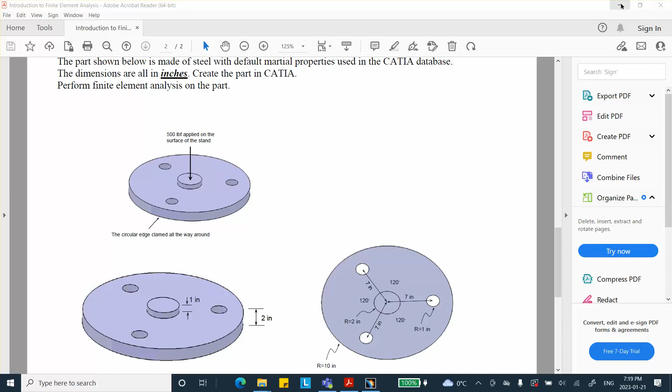All right, let's go ahead and do that. We start with the Catia file, file, new part. Immediately save it. I already created a folder there. File, save management, save as. I created a folder called Activity 3 Lab 3 in there. I'm going to call it part problem 3. Please make sure you don't overwrite parts when you write tests and the final exam.

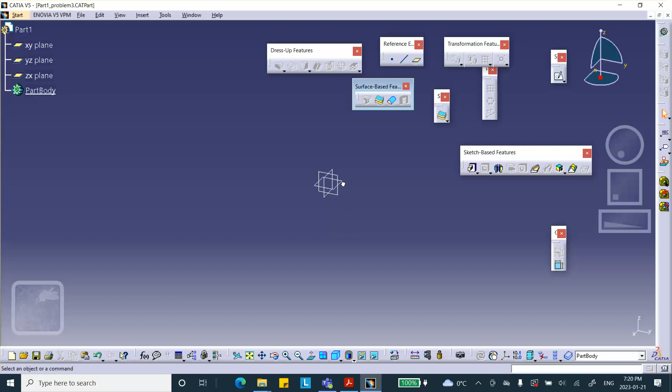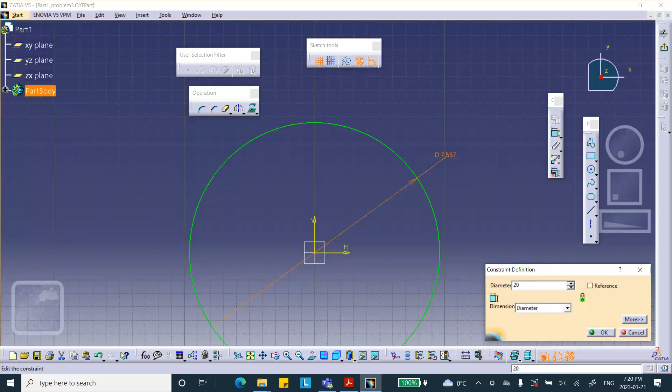All right, so on this plane, I will sketch a circle, and I believe the radius of that big circle is... can't remember... 10 inches. Radius is 10 inches. Yep. Diameter 20. Okay, oops, 20. Okay, fit it. This is fit. Okay, fit it.

In class, when I did this thing in an earlier activity that the video is already posted, I used a multi-pad, but I'm not going to do it like that. Okay, I'll just use the pad. So exit. Oh, this circle, see that? Because I want to make a hole, I will draw a circle here too. Because I want to make a hole. That's one way, make a pocket. That's one way of doing it.

First of all, the distance, if you look at the drawings here, the diameter — radius is 1, diameter 2, okay? And it's positioned 7 inches away from the center. So let's see now, the dimension from the center to that point is 7.

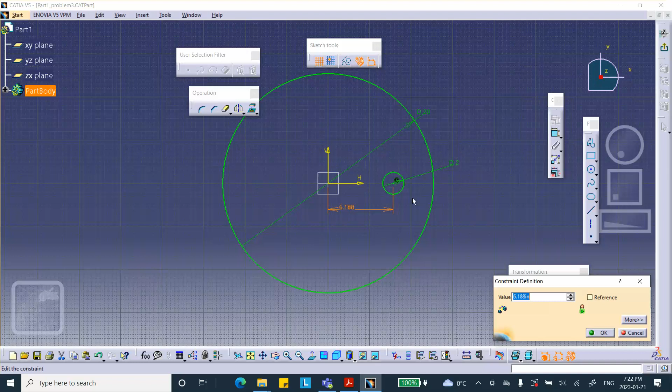Oh, this is going to cause a problem. If you do it like that, mm, yeah, you know what, I'm going to cancel this. I'm going to delete that. I'm going to delete this. Let me delete this point too. Exit, pad it. There are many ways of doing this problem. I was going to go that route, but I will let you decide how you want to do that. You pad 2. There we are.

On that face, I will sketch. Now that circle that I drew over here, the diameter 2, and the distance from this point to that point, 7.

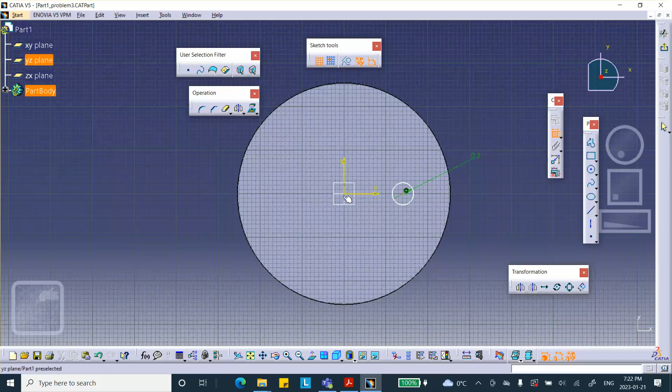Okay, exit pocket. There's the pocket. Pocket that sketch. Pocket all the way to the end.

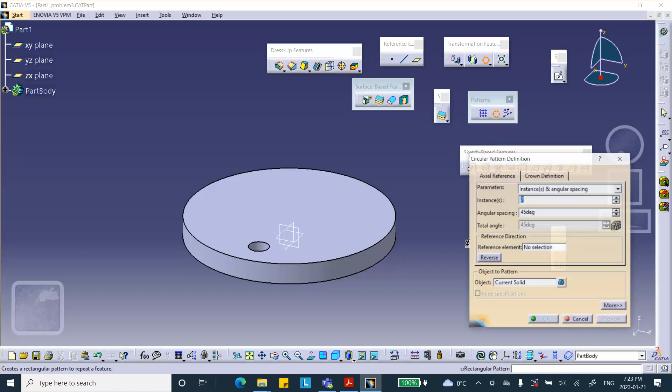Now I'm going to do a circular pattern of this pocket around that, a complete crown around that part. So where is the pattern here? There's three ways: rectangular pattern, circular, and arbitrary. Circular. Read it carefully, I want to do a complete crown. Axial, complete crown, see that? Axial right there, axial tab. Complete crown.

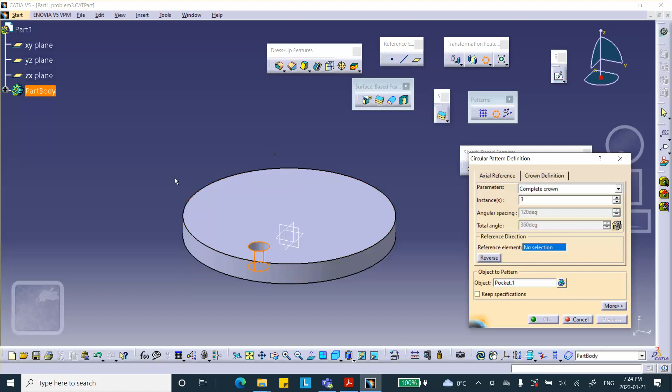Three instances of what reference? Well, of what is it that I want to pocket? What is it that I want to pattern? Is this pocket that I want to pattern? And what is the reference element? Reference element, basically this circular face. If you take that circular face, it will do it around the axis of that circular face. There we are, and we say okay.

It's crazy because in a few minutes I'm going to cut this thing, but on that face I will sketch a circle to make that little stand in the middle. And what is the radius of that circle or diameter of it? It looks like, let me see, radius 2 inches. Okay, radius 2 inches, so diameter 4 or radius 2.

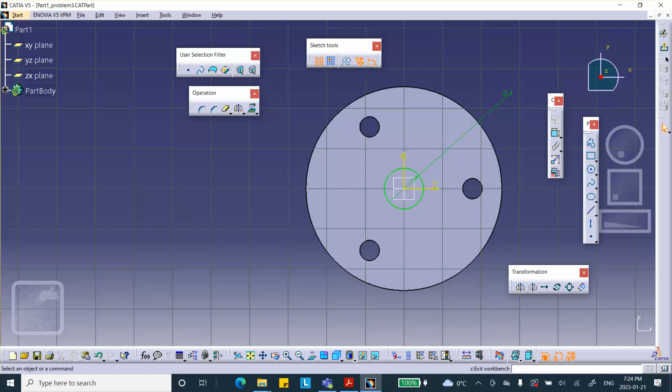Excellent. Exit, pad it up by the amount which seems to be 1 inch in the drawing. There we are. And let's apply material properties to it. Properties are metal, I think it says steel. Yep, steel. So we're here on that part, and we say okay, and we save.

It's crazy now because I want to cut this thing to get only the smallest piece, to get a 60-degree sector here. Now, one of the planes, let me see how did I draw this thing. One of them I already have, like I can cut, if you look at the view from the top, this plane can be used to cut this. But I also need a plane at an angle with respect to this.

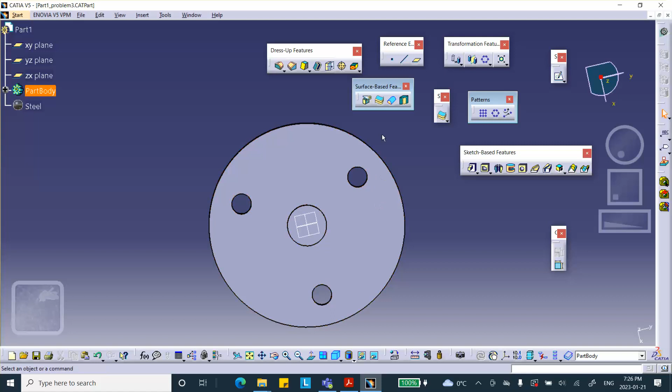So let's try to do that. So I'm going to do a plane. Just be careful here, you do it any way you want, this is how I'm going to propose to you. Plane, and the method that you're going to use is called, let's see now, offset, angle, normal to a plane. Let's see. Offset from a plane, no. Parallel through a point, no. Angle normal to a plane, this is what you want. Click on it, it's asking you for a few things.

Rotation axis, Z axis, right click Z. Reference is that plane that I want to rotate. And 60 degrees is by how much? Preview, you see that? It created this plane at 60 degrees to that reference plane that I selected.

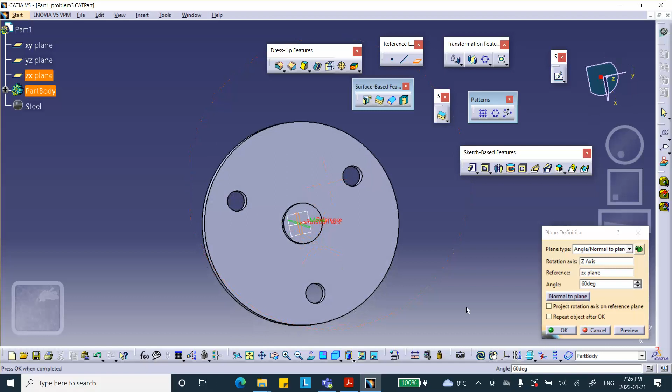Good, now we're going to cut it. So use the mirror cut, let's cut it with this. On which side? No, not mirror, sorry, cancel, not mirror. Split right there, right there. Surface base feature. Saw, the saw.

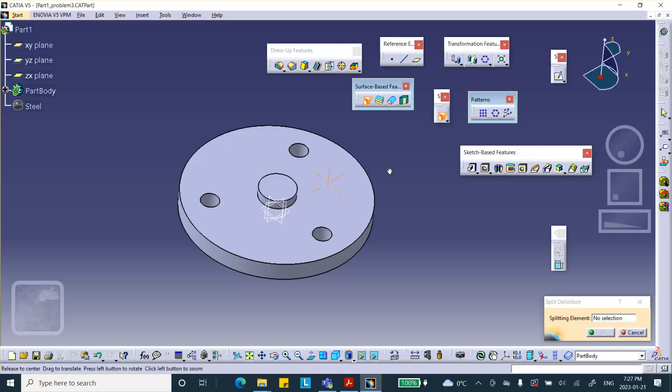Okay, let's try it. We want to cut it with this plane, doesn't matter which side we take. That's good. And then we want to split it with this tilted angle. We want to see, I'll keep the other side there. So that is a 60 degree slice that I wanted. I could have made this thing from the very beginning.

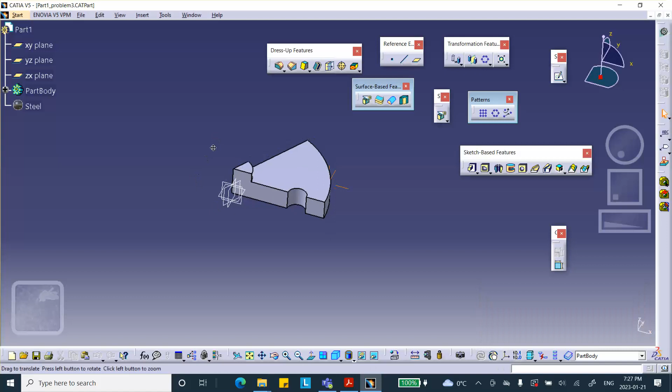Okay, so save everything. And now we're going to go to the Generative Structural Analysis. We want to do a static analysis. Okay, and by the way, you can make a finer mesh around this hole if you want.

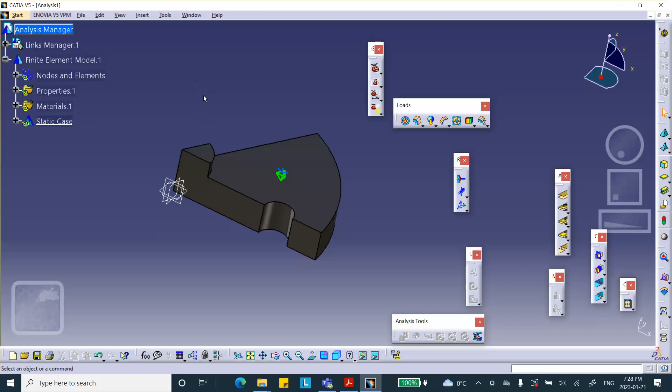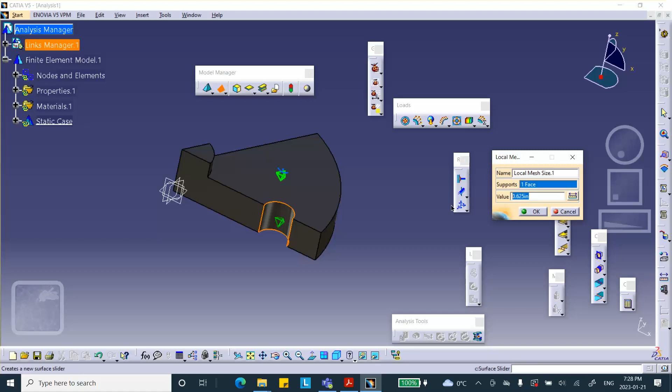So as a reminder, this is the first time you're going to see it, but let me do the following. Suppose I want to stick a finer mesh around this hole. So if you look in this toolbar, and if you expand this icon, it says local mesh size. You click on that, and then it says where do you want to refine? So around this hole, and by how much? Let me make it 0.2. Say OK, you see, around that hole, the mesh size is this.

Everywhere else is different. So if you look at your mesh, right-click mesh visualization. This is how you do local mesh refinement, and I will ask you to do something like that on a test for sure. Okay, there it is, finer here, bigger there. And then deactivate, proceed with the rest of the problem.

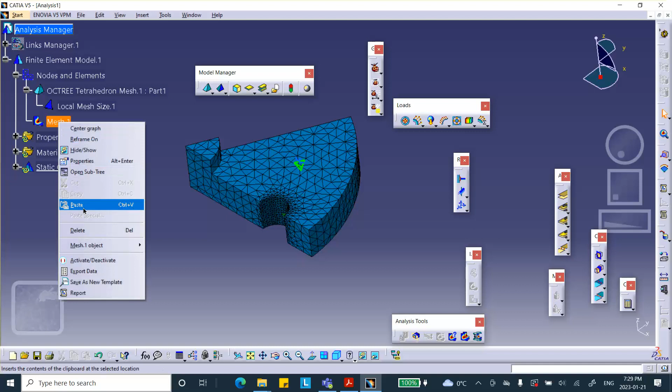Okay, planes of symmetry: this, and that, and the one in the back, these are roller supports. So we go with surface slider on this face, and on that face, and turn it around on this face. You can do the three of them separately if you want, but this is crazy.

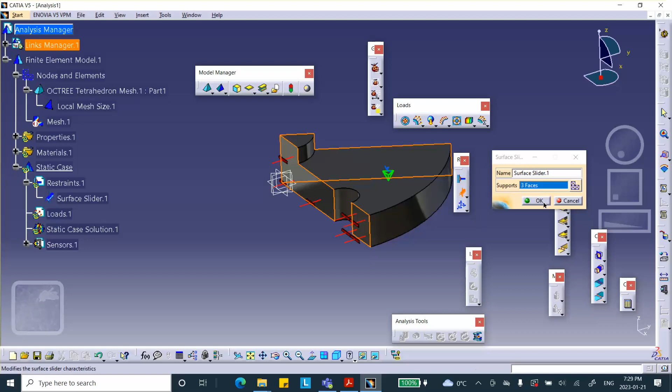Okay, I did all in one. We are told that this bottom edge is clamped, completely clamped. So you click on this clamp, just the bottom edge, and then we say okay.

You're also told that a total force of 500 pounds is applied there, but we're taking 1/3 of that, so it's 500 over 3. This is a force, so you have to divide it. If it was a pressure, you would not divide. So 500 divided by 3.

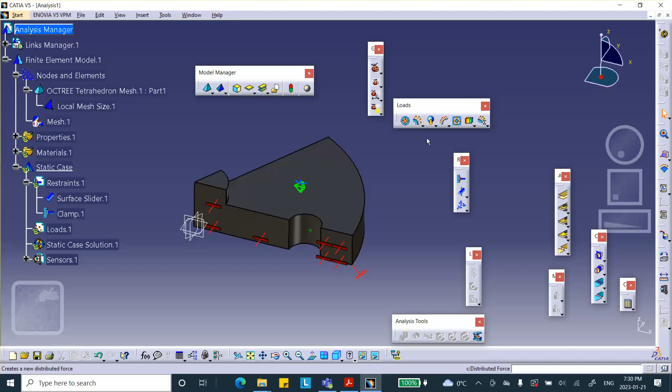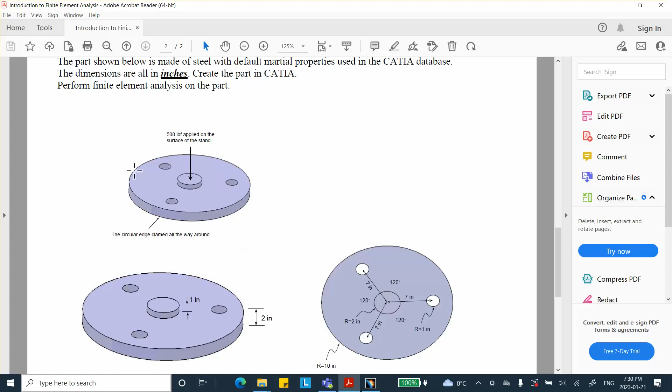So we go here, look for force—this is pressure, this is force, you click on it. You select that face. Did I say divided by 3? Sorry, divided by 6, that's what I meant, because we're taking a 60-degree sector, 500 on the whole thing which is 360 degrees. We're taking a 60-degree sector, so that's 500 divided by 6.

So in the Z direction, negative 500 divided by 6, you can do that. I'm just going to turn it into the right value. You can see right here on that face in the negative direction, and we say OK.

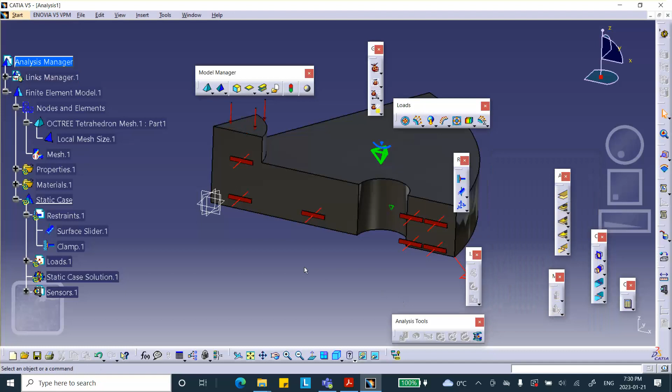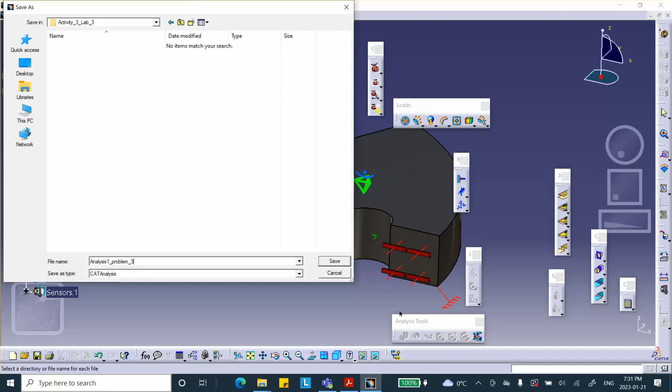And okay, and I'm going to run it. Calculator, right here, calculator, compute. Ignore this because in all likelihood you guys don't get it—I don't get it on my other laptop either.

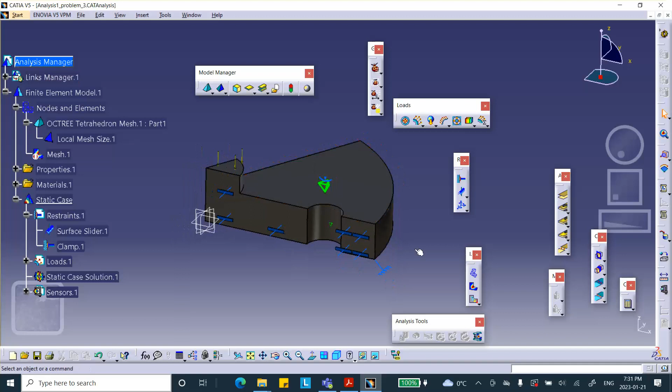Okay, let's see. Deflection or deformation looks like that. Animate makes sense, right? Because this edge is fixed. These edges do not change shape. There's a roller support, and this thing goes down.

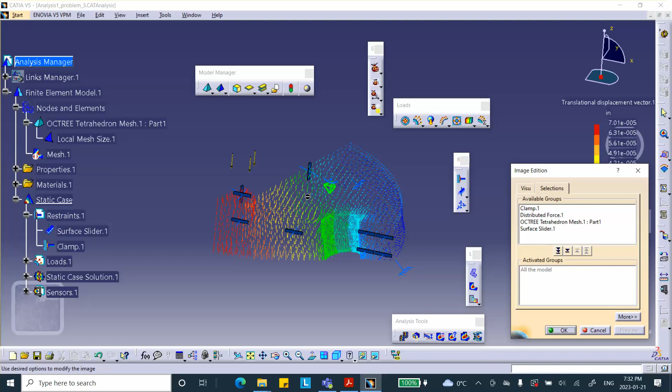You want to look at the displacement, you click on displacement. Very small, these are gigantic, bulky things. You click on this icon either anywhere on these arrows or from the tree. You can click on this line too—let me cancel that. You either put it there, but as soon as you put the cursor there, this thing lights up.

So you can double click here, or you can double click on these arrows under visualization, average ISO, and make sure the rendering is material shading. It is. There we are. And a very tiny amount of deflections.

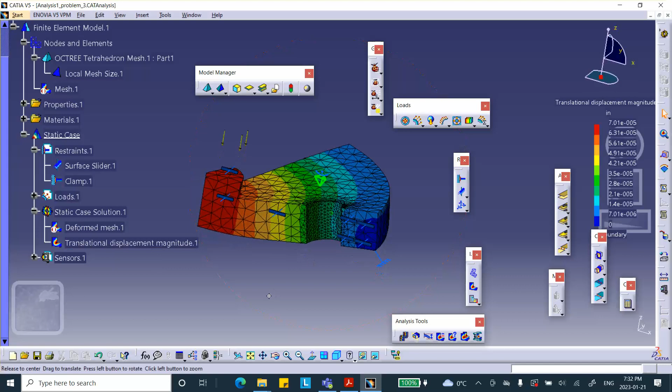But stresses are going to be pretty high probably down here, because well, let's find out. In all likelihood, it's going to be high there. So look at the Von Mises stress. Yeah, you can see that, because there's no way you can hold an edge and fix it—no way, no way. And now these stresses are masking basically other stresses. That's why it looks like that.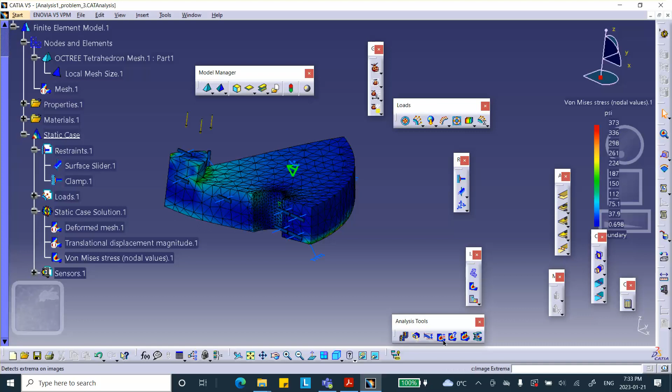By the way, there's something called cutting plane. You know what, let me do the following—let me stay away from these edges, show you the stress distribution there. You can't see it here, it's all blue because they're so much smaller compared to these. But let me first show you the cutting plane. You can cut this thing and look at the inside of this part. See that? You can look at the inside of the part.

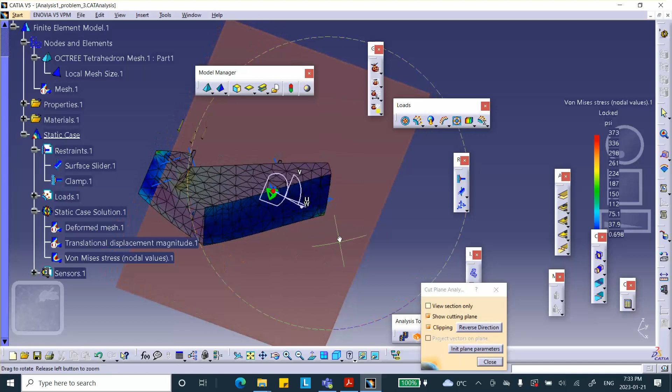But these numbers don't change though. You can see that by rotating, looking inside does not help you to know what the values are there. Okay, incidentally, you can say don't show me the cutting plane. See that? All right, that's what this thing is.

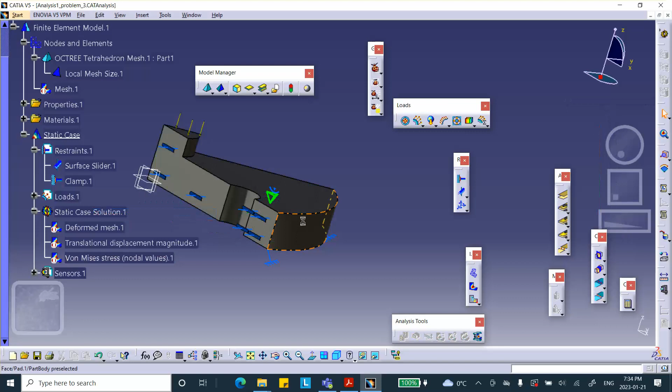But what I want to do is look at the stresses here. So let me deactivate this and make a group. This is a good place—nope, I'm going to resize that. You have to click on this guy. This is the active box. Now we activate it, we put it where we want, and we resize it as we want.

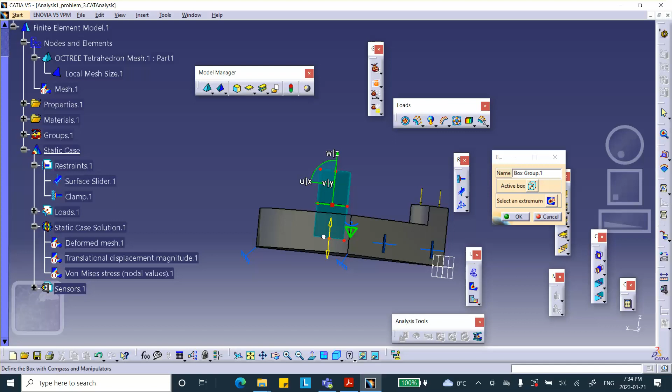So let me put it there. I don't want to go all the way down because that defeats the purpose. So let's look at, for example, the elements in this area, whatever is enclosed there. So we say okay, if you want you can hide the box, and double click on the Von Mises stress, select the selections, box group—just show me the stuff in the box group.

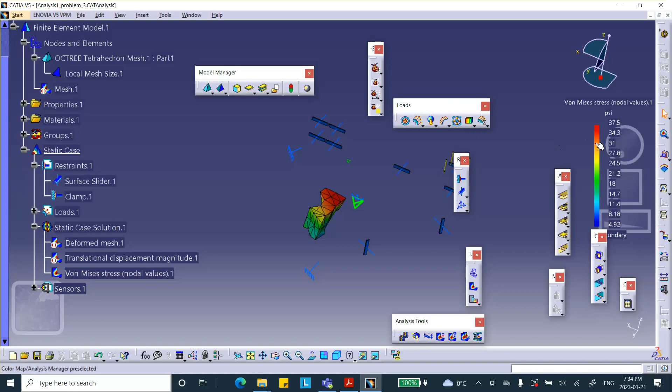I mean, these are terrible—it's so small that it really doesn't make any difference, but there's nothing. If you want to see everything back, double click and say show me everything. All right, that takes care of reference number, problem number 3, activity number 3.